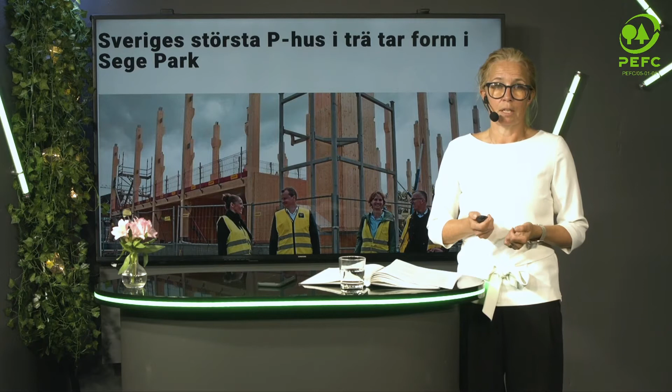This is an office building taken from a time-lapse video camera up in Uppsala, north of Stockholm. And a parking house is being built down in Skåne, in Malmö, 6 stories in CLT.

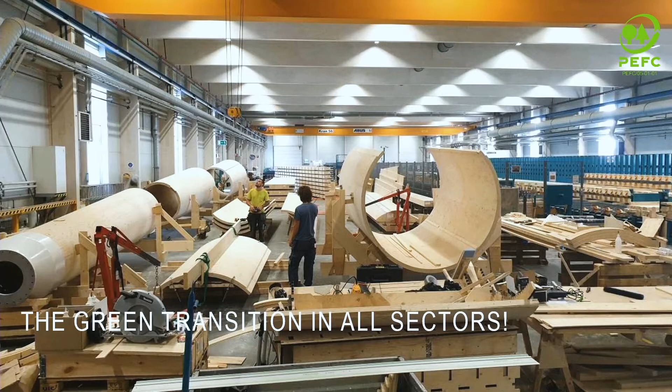We have caring homes, and we have also a lot of other types of infrastructure, such as this windmill in Glulam and LVL. And it's being erected, the first ones, outside Gothenburg in the archipelago. And it's built with the same logic as we build other types of building and even housing.

It's built in a modular way. It's really easy to transport thanks to the lightweight and the modularity of the construction, and it's being erected on site and has a really, really low carbon footprint.

And we, of course, also see wood as an interior material for interior use. Also, this staircase, which is in NCC's new headquarters in Stockholm, is being prefabricated and transported into a building site and then put into place at a building site.

So why wood in construction? Well, it's not just about exchanging one material for another. It also means that we have a new kind of business logic. It goes from being very much project-orientated to process-orientated. So the process itself, manufacturing technology, quality assurance, continuous improvements, experience feedback, all characteristics from the industrialized wood building industry.

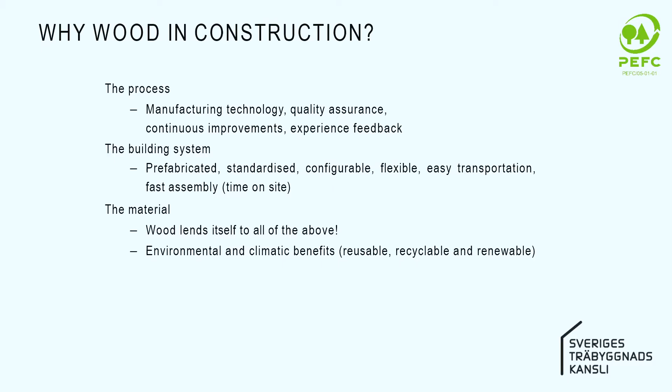And then we have the building systems, prefabricated, standardized, configurable, flexible, easy transportation, and also fast assembly, meaning a short time on site. And the material itself, of course. Wood lends itself to all mentioned above, and also thanks to the environmental and climate benefit from the material itself. It's reusable, it's renewable, it's recyclable.

And the construction industry, when I'm talking about more effectivity and the need for a new building process, has during time proved to have difficulties to develop in the same way that other types of production does. Still has a very poor productivity in general, and actually no improvement at all compared to industrial production. So this is really a hugely important area where wood construction comes into play.

This is perhaps also one of the most important issues to deal with when it comes to sustainability, is to really make use of all the resources that we take on.

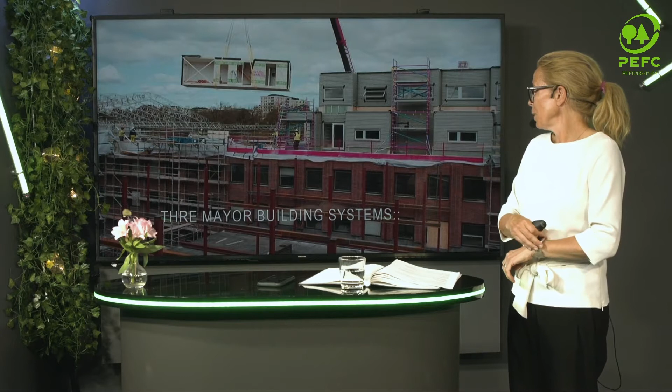Wood construction presents three major building systems. We have the modularity, with modules built to a very high degree with prefabrication on site. Almost 85 to 90% is built at the factory. All the kitchen, the bathrooms, etc., are mounted and put into place already in the factory. Short time on building site, and just the small adjustments are built on site, which is of course highly useful when we build in the already built environment, and also of course cost effective.

Then we have the CLT and panelized base system with load-bearing walls, and the whole structure in CLT. It's growing really fast and enables much more, or a higher level of flexibility.

And we have also development of post and beam systems based on glulam, often used in office buildings and commercial buildings, where also the flexibility and long span is needed. And there is also development of new systems and hybrids and combinations in between.

We have a wide presence at the leading universities, with the big universities having wood construction within their education. There is a lot of municipalities developing knowledge through wood building strategies, and we have some 15 producers of timber building systems.

We have big investments in new capacity, especially in the CLT. New suppliers, new producers are entering the market. And we see also that the building industry, the big entrepreneurs, are taking on wood projects at a growing pace.

We have strong wooden architecture, a great variation of projects throughout the country. And there is also a strong political push for wood construction. I'll come back to that.

The driving forces for wood are these. First and foremost, now it's the climate, the need to change the way we build and the material we use. But there is also a need for housing.

We still have a shortage of housing, almost all around Europe, in the world I would say. But in Sweden especially, this is a driving force.

Helsinki's target is to be carbon neutral by 2035. The most significant emissions generated in urban areas come from heat and electricity consumption and traffic.

The emissions need to be reduced also holistically, taking into account the emissions of city structure, construction and maintenance. The energy sector is moving forward quickly, so the portion of building is going to get bigger.

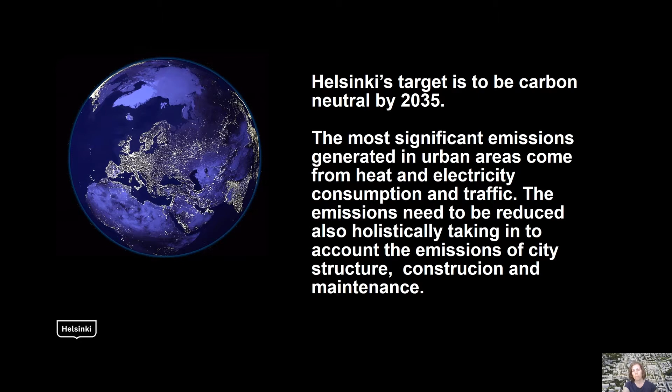Helsinki aims to be carbon neutral by 2035 and has an action plan with 147 actions towards this goal. We need to implement every single one of these goals, and we need to do it now if we want to achieve this goal. The action plan affects basically everything we do. We need to look at Helsinki and the world through carbon neutral lenses.

19 of the actions affect detailed planning one way or the other. Wood is one of the big issues in the action plans also.

So why would we have to build with wood? In order to reach carbon neutrality, at least at the moment, we need to focus on wood in the building industry. In the Carbon Neutral Helsinki Action Plan, I think one of the most important actions in detailed planning, at least at the moment, is the action plan to build more wooden buildings.

In building construction, we need to choose the most low carbon materials as possible, and at the moment, wood is the answer to this challenge.

People have asked me often, is there enough wood to build so much? Well, if you build a 5-story apartment block from wood in Finland, it takes 10 minutes to grow back in the Finnish forests. Or the same thing, if you build 138 wooden apartment blocks every day. So at least in Finland, it's not an issue. There is enough wood.

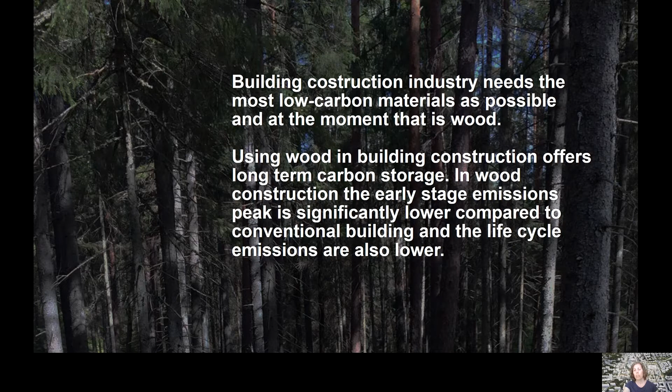Wood offers long-term carbon storage, and the emissions during building construction are significantly lower than in conventional building.

We've generated a new tool for detailed planning called HAVA to calculate life cycle carbon footprint and handprint. We made it so simple that it could be used in all our detailed plans so that we could get as carbon neutral as possible.

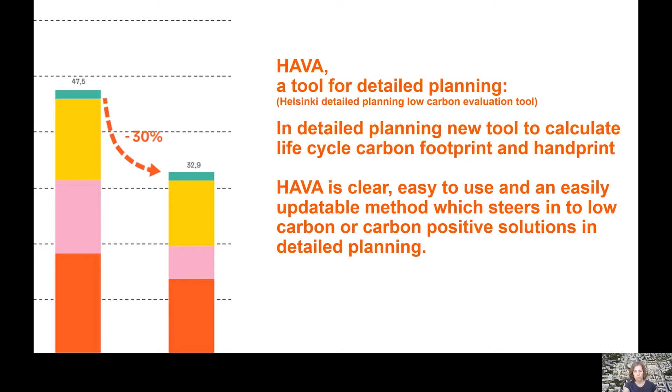Construction and maintenance may be almost 50% of the emissions in a life cycle of an area, so using wood in construction is a very significant part of aiming for the carbon neutrality target.

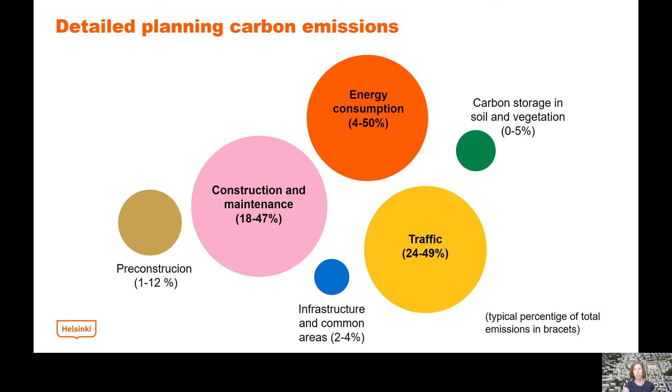So what's happened so far in Helsinki? Out of nearly 7,000 housing units yearly, the amount of wooden homes is still a very small minority in multi-story housing units. In this graph, you can see that the amount has been even at its peak, 8 buildings. Now we are hoping to change this radically.

43 buildings in 18 years, it's not very much.

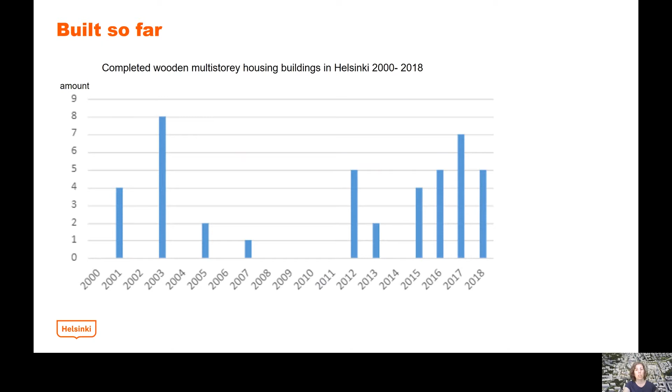The first detailed plan, which required wooden structure in a multi-story housing, came into effect about 20 years ago. There was some experimental building, and not all were built actually with wooden structure. But the one with wooden structure gained a prize and some praise.

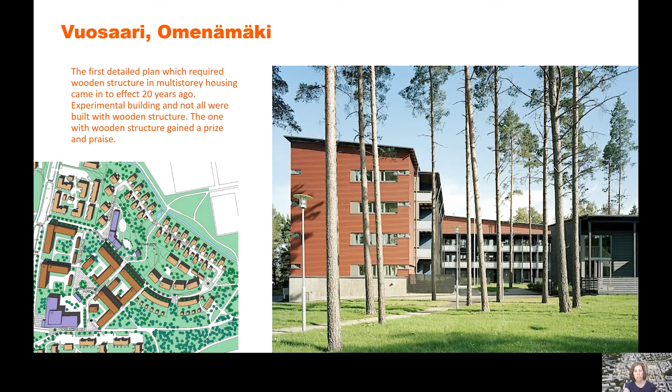A wooden village for 2,000 people started to be built around 2010 in Honkasuo.

Betoniteollisuus ry, the so-called Confederation of Finnish Concrete Industries, made an appeal against the detailed plan with wood requirements, but the appeal did not succeed. The judicial system assessed that requiring wood in building is justifiable for the positive impact on climate. This helped many Finnish cities to start requiring wood in building.

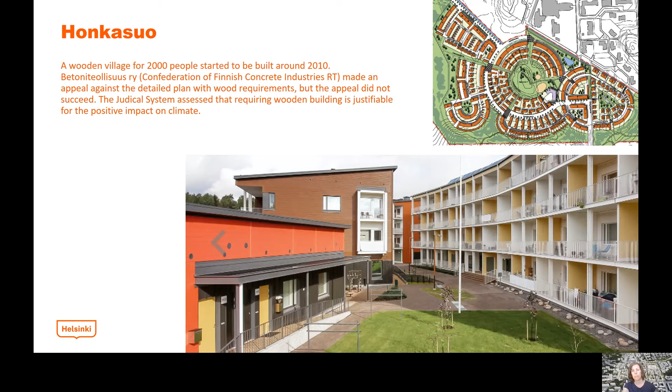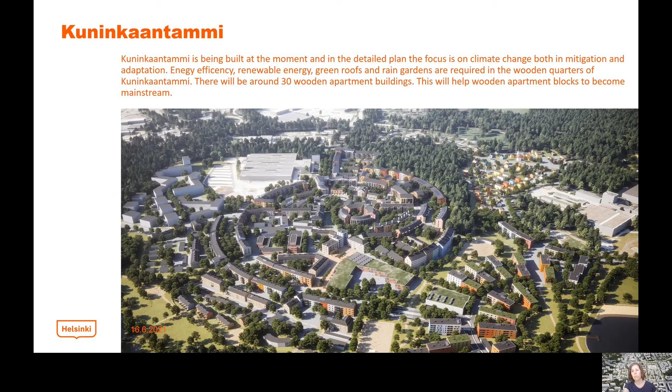Kuninkaantammi is being built at the moment, and in the detailed plan the focus is on climate change, both in mitigation and adaptation. Energy efficiency, renewable energy, green roofs and rain gardens are required in the wooden quarters of Kuninkaantammi. There will be around 30 wooden apartment buildings. This will help wooden apartment blocks to become mainstream in Finland.

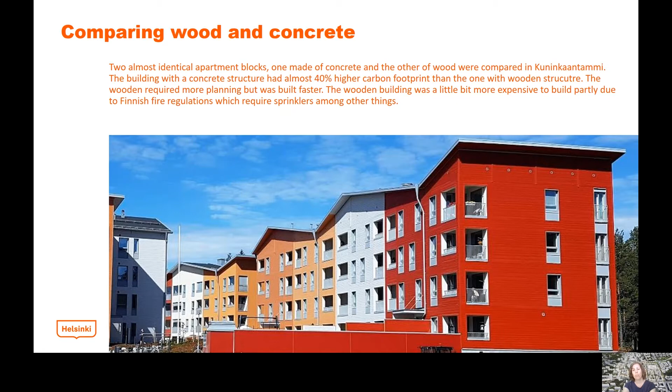In Kuninkaantammi, 2 almost identical apartment blocks, a concrete one and a wooden one, were compared. The building with a concrete structure had almost 40% higher carbon footprint than the one with a wooden structure. The wooden one required more planning, but was built quicker.

Several wooden schools and daycare centers are being built in Helsinki, among other public buildings. Most of them are required to be wooden from now on. Lapinmäki was the first daycare center with a massive wooden structure.

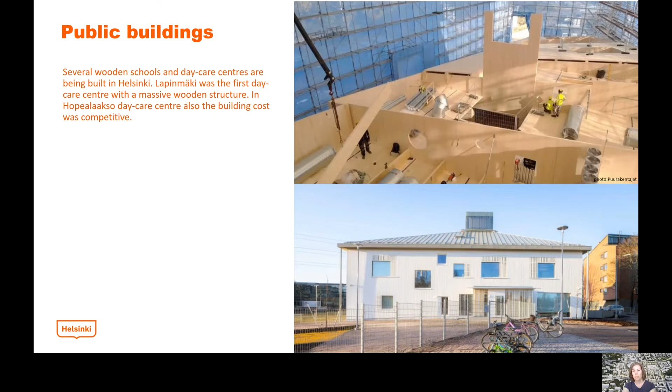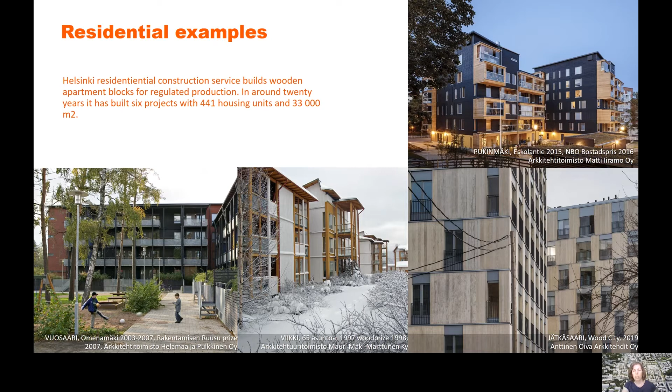And some residential examples. Helsinki Residential Construction Service builds wooden apartment blocks for regulated production. In around 20 years, it has built 6 projects, but it's going to be increased in the future. Here are some examples from Vuosaari, Pukinmäki and Jätkäsaari, so all over Helsinki.

So how does the future look like in Helsinki?

Concrete has been for so long the main construction material that people don't come to think about building with wood. This applies especially in infill building, but we're about to change this. Industrial prefabrication is popping up more and more, and hopefully wood will be seen as normal construction business in the future.

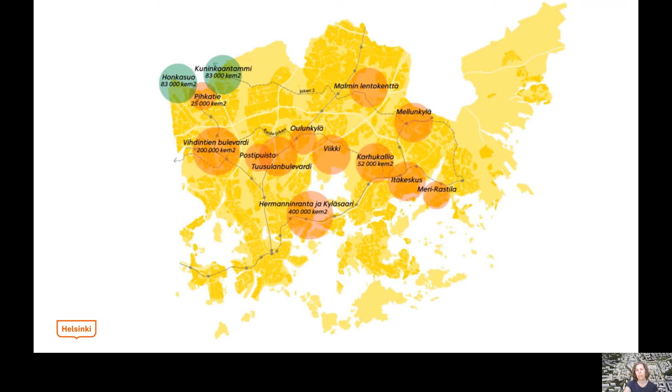Here's one project which has been really interesting. A project with the purpose of developing a wooden parking garage that meets Finnish standards was launched in March 2020. Using wood in parking garages could help reduce the carbon footprint in construction.

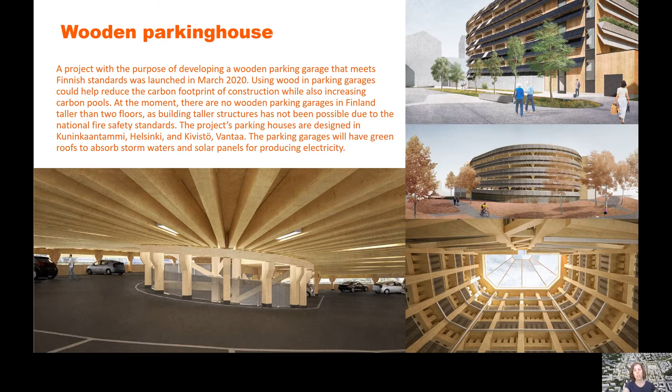The project's parking houses are designed in Kuninkaantammi, Helsinki and Kivistö, Vantaa. Vantaa is right next to Helsinki. The parking garages will have green roofs to absorb stormwater and solar panels for producing electricity. I'm really hoping to see these built in a few years.

How about urban renewal? Is wood okay in there? Many people say when asking about building in wood that yes, we want to support building with wood, but just this plot, or this location, or this project is not suitable for it. This is why we need to talk about building in wood more, so that it comes up in early stages, so that it is possible to build with wood.

In infill building, wood is very suitable because it's light, especially for adding floors, and the buildings may be prefabricated, so they are quick to install on their plot, so the public wouldn't mind the building so much. Wood is also a likable material, which the neighbors will accept more easily.

Here's an example about wooden redevelopment and adding floors. There has been an interesting project where the outer shell of a 70s concrete block has been redeveloped in wood, and there's been 2 floors added on top of it, also in wood. There's so far been a competition about this, and we don't yet know when this will be realized.

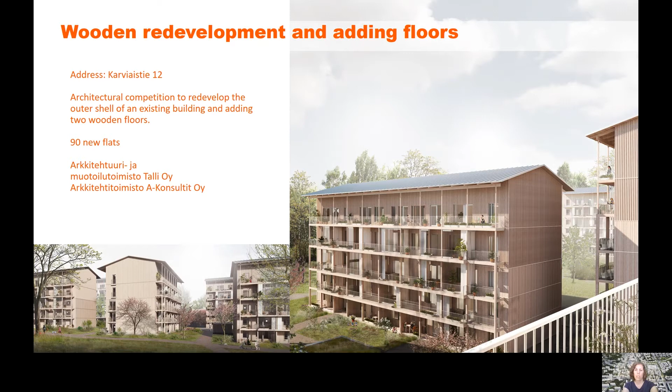We also have a master's thesis project going on in Tampere University for infill building. Marie Yli-Äyhö is designing a serial produced wooden apartment building. The building's construction is massive wood and has possibilities for variation. I'm very eager to see how this develops, and hopefully we'll be able to build these one day.

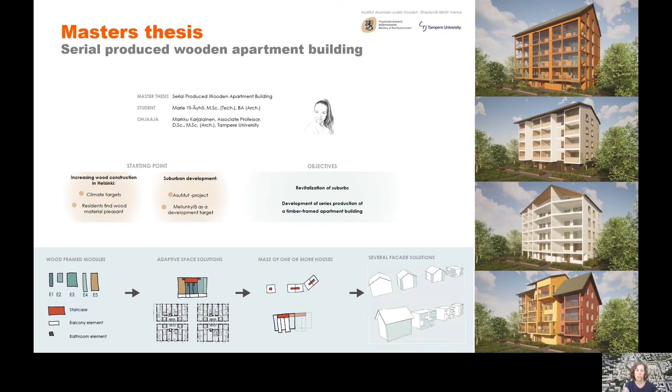With the same basic structural solution, buildings with varying architecture can be achieved, as you can see on the right-hand side.

The winner had a flexible concept that allows a lot of diversity and phasing, etc. Wood was being used in residential building in many places, and it had vibes from the 70s in an interesting way.

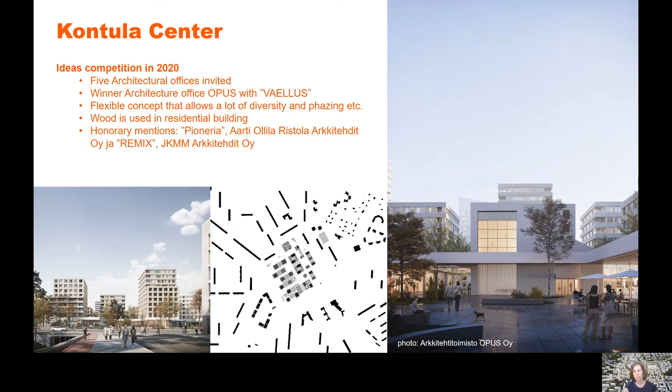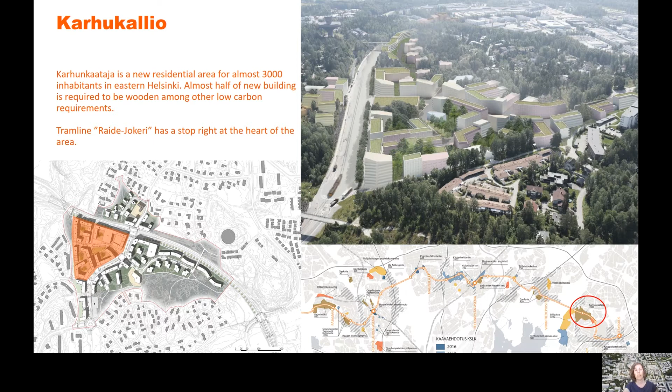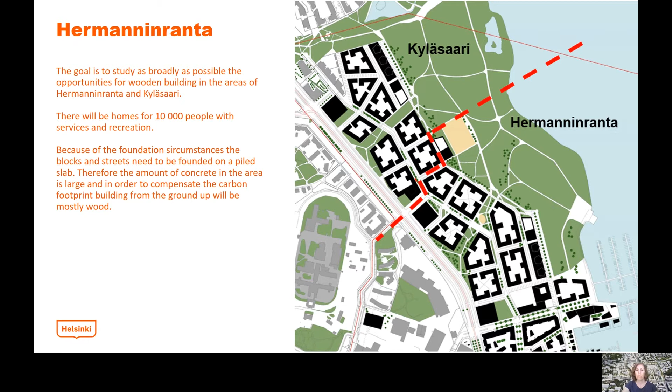Hermanninranta is also a big new area right next to the center. There will be homes for 10,000 people with services and recreation. Because of the foundation circumstances, the blocks and streets need to be founded on a piled slab. Therefore, the amount of concrete in the area is already large, and in order to compensate the carbon footprint, building from the ground up will be mostly wood.

While Hermanninranta is going to be a substantial area with wooden building, there are several questions that need to be considered during the planning process, like the impact of wooden building on cityscape, or wooden building in welfare and living conditions, the impact of wooden building on climate change mitigation, and the readiness of the wood industry. How will planning regulate building in wood?

But since choosing wood as the primary construction material at an early stage, all these questions will be able to be answered as we go ahead with the planning.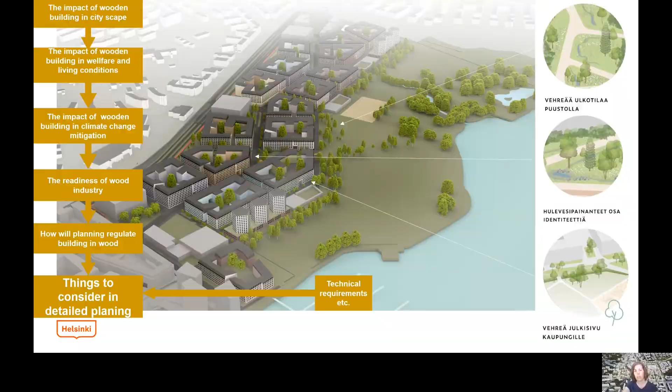Helsinki East Urban Centre is one place where we will have a lot of new building in wood. There was an international ideas competition in 2019 and 20.

We have ambitious goals towards a more resilient city structure for central Eastern Helsinki. Wood as a building material, walkable city structure, and existing excellent public transport infrastructure give a lot of potential for the future. There will be around 10,000 more inhabitants from 2024 to 2035. The goal is to make East Urban Centre as low carbon as possible, but the means are yet to be determined. Wooden building is definitely one of the means.

Carbon Neutral Helsinki 2035 action plan will steer us in the future. Puotilanranta is right next to East Urban Centre, or Itäkeskus, and it also has goals towards being carbon neutral in the future. City planning takes such a long time that the plans and designs we make in city planning should already be carbon neutral.

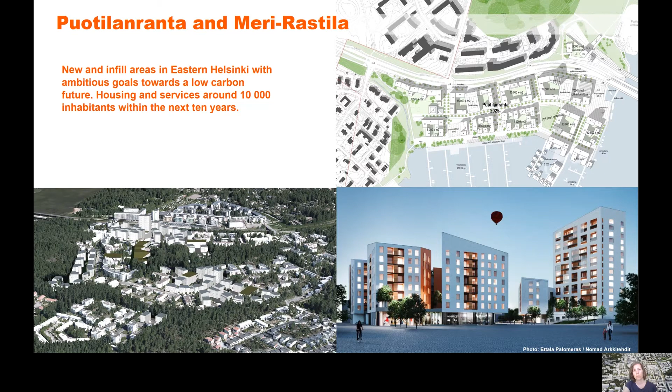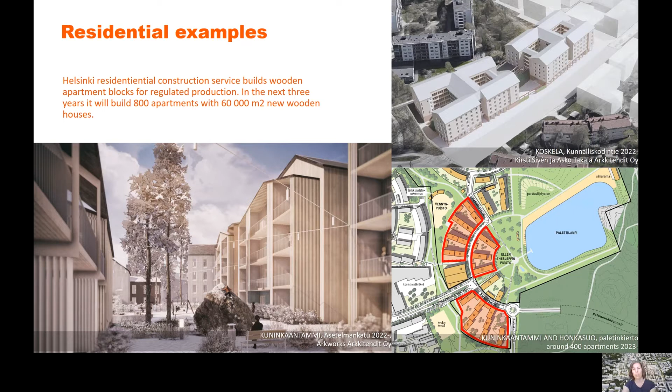Here's a couple of residential examples also. The residential construction service builds wooden apartment blocks for regulated production, and in the next 3 years it will build 800 apartments with 60,000 new square meters of new wooden houses. So the speed in wooden production will increase there too. There has been some concerns about builders though - is there enough builders, enough knowledge in design and construction, etc., if we want to build so much in wood?

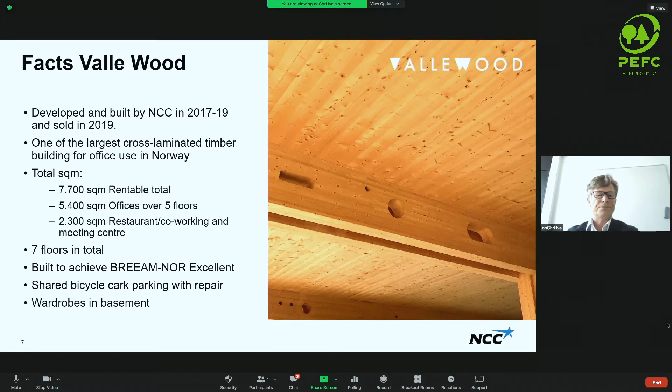We can't dig into the whole concept of the building, but it's also a new way of thinking about how to integrate the tenants' needs with the commercial areas. That's quite new in Norway, and it's a new business model for the tenants in this building.

As you see, it was very well received in the market. It's a beautiful building with a lot of special features to it. So we really should go and visit Valle Wood if you have the opportunity.

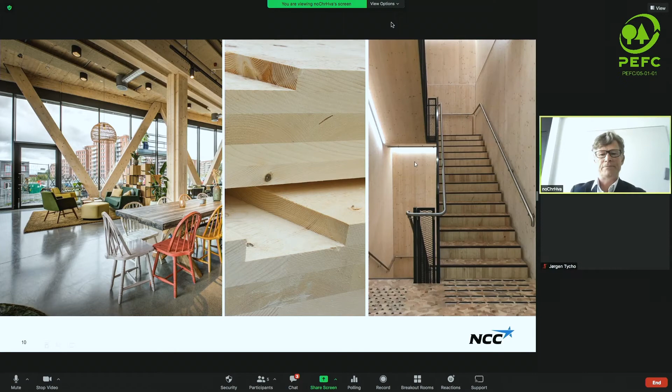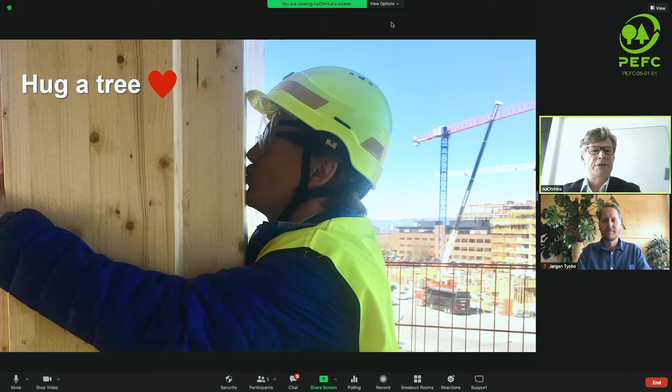Of course, one of the main things is that everybody loves wood, and also the builders. They loved to build this building, and we had very low absence of sick leave. That's unheard of in normal NCC buildings.

Okay, then I give the word to Jørgen.

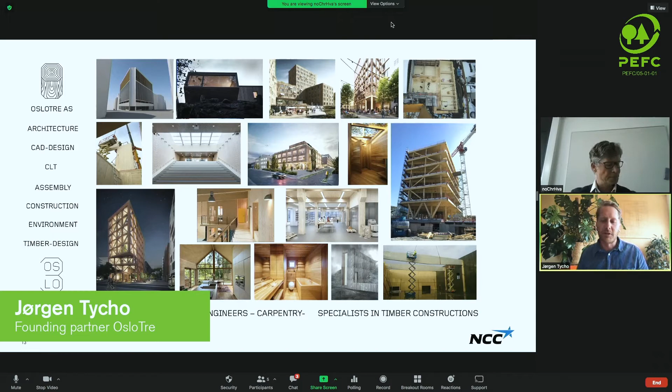Hello, good day. My name is Jørgen Tycho. I am creative director of OsloTre. We are an architect and engineer company specialized in timber constructions for the last 12 years. On the Valle Wood project, we assisted NCC to develop this timber construction.

So when we work with timber, it's important to know this about photosynthesis: the tree is actually working as a carbon harvester or sequester, and we can store all this carbon in the biomass.

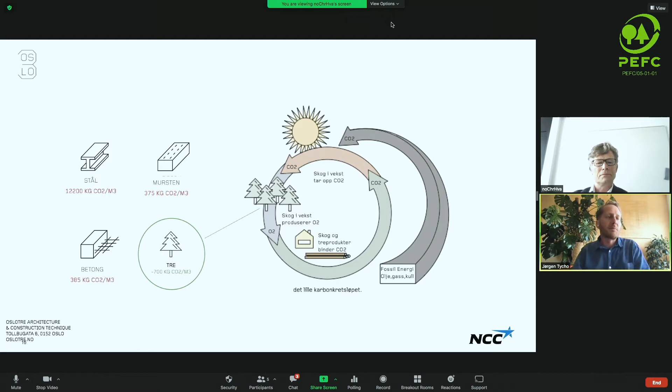By working with this small carbon circuit, this is also a way of working with carbon that is possible for us to understand, because otherwise we work with cycles that span millions of years.

By using timber as our main building material, we can actually have a negative carbon footprint, as opposed to other commonly used building materials that have a large output of carbon during production.

In this way, we can start to look at the forest as a carbon sequester, and our buildings and cities as carbon storage units. In this way, in the short run, we can deal with some of the carbon issues we have in the building industry today.

Valle Wood is a 7-story pure timber building. You can see the facade here. It's made of heartwood of pine that is untreated, but it's fire impregnated.

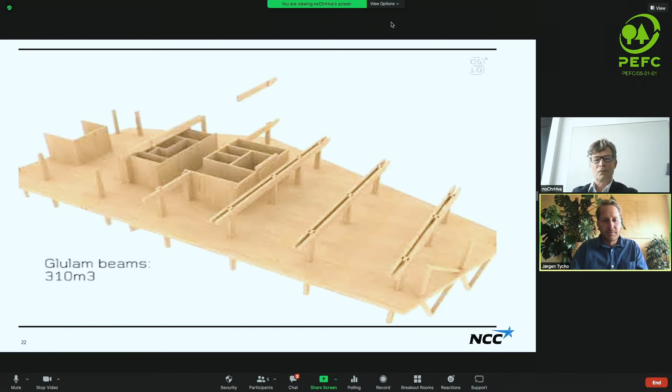I think this is a video, Christian. It won't start? Okay, we'll just go past it. It's on YouTube.

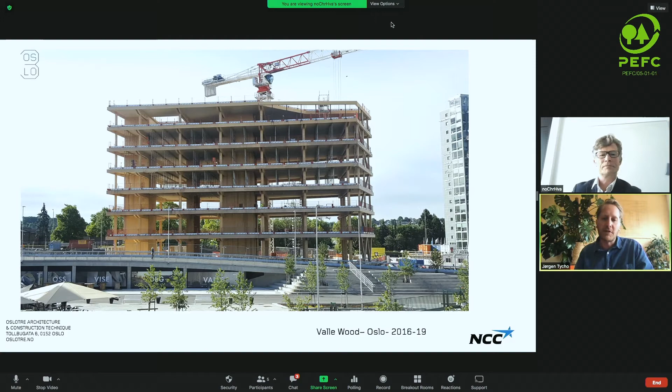Here we see the building before the cladding is on. What we see are the vertical towers for the elevators and escalators made of CLT. Then we have the column and beam construction of glulam, and then we have the CLT slabs, or the TCC slabs. The actual span here is 7.5 meters, which is a good span for an office building.

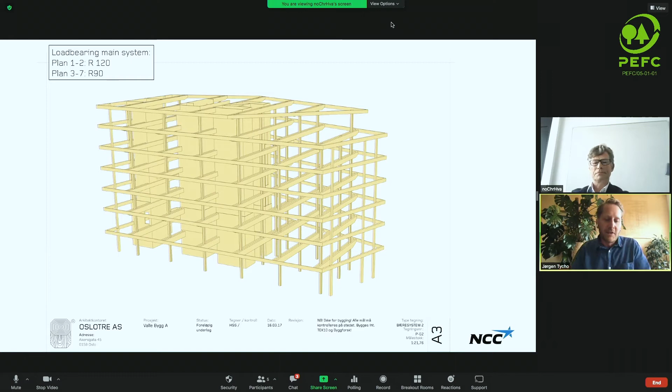Timber burns, but it burns very predictably. So all we see here is actual visual wood, and we wanted to have as much visual timber as possible in this building. But that gives some quite drastic fire requirements: we have 120 minutes on the 2 first floors and 90 minutes from the 3rd floor and up. We handled this by making the timber a bit fatter, a bit bigger, to meet the fire requirements.

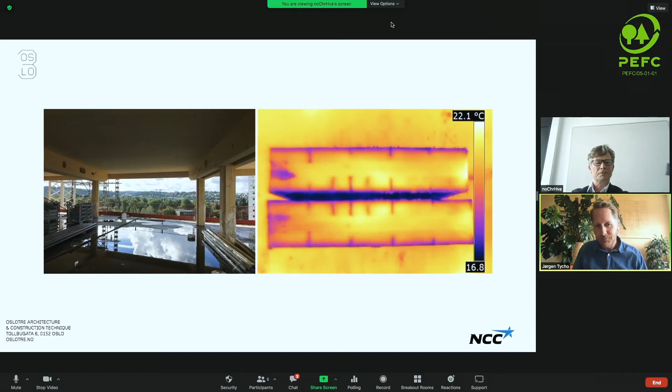Water is also an issue on a building like this. On top of the CLT—here we see the CLT slab, which is actually a TCC slab. It's a timber concrete composite working together, where the timber takes the tension and the concrete takes the pressure, making this slab extremely thin: only 24.5 centimeters thick. Actually thinner than what a concrete slab would be with the same span. A very interesting slab, and also, to my knowledge, the first time used in a large-scale building, in 2016.

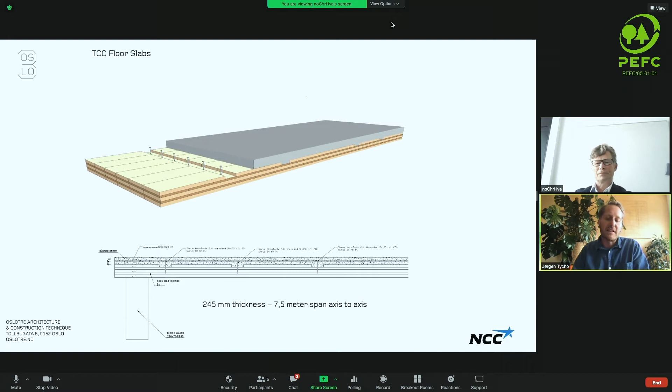So when we work with timber, the reason we work with what we call engineered or modern timber is because of BIM and digitalization, allowing millimeter precision before we send it to the factory for production. This is also very important to be able to build these super precise timber constructions.

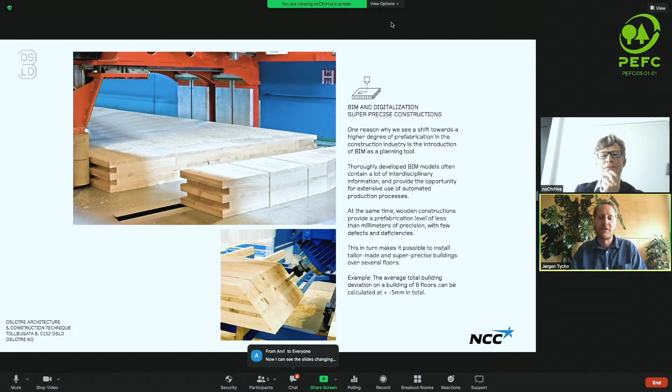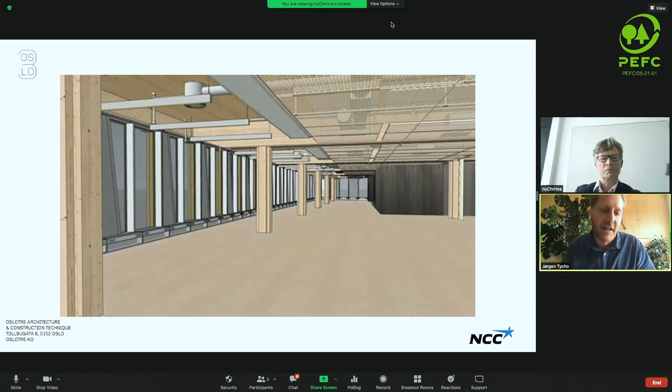So what was done was building up this building set, almost like an IKEA model, where all the different advisors were part of it. You can see all the installations. Everything is planned before building start, which is an important premise when you build with timber. You need to design it completely before starting production. This way we can also make a much more economical structure, because we reduce material loss, and it's much easier to plan for construction.

What is done is that even every element, every piece that goes into the building, has a lot of knowledge and information added to it. This way, when we come to the building site, you don't really have to think that much. All you have to do is assemble these pieces together.

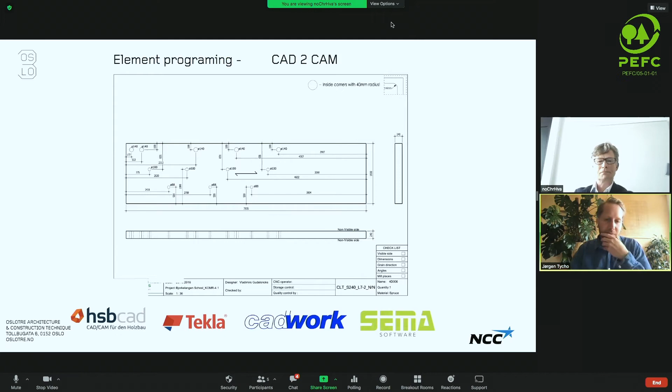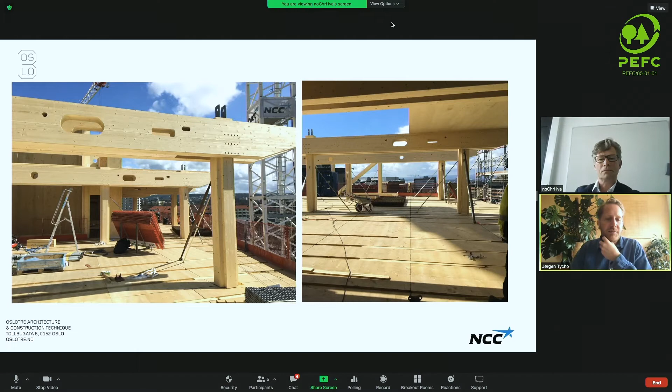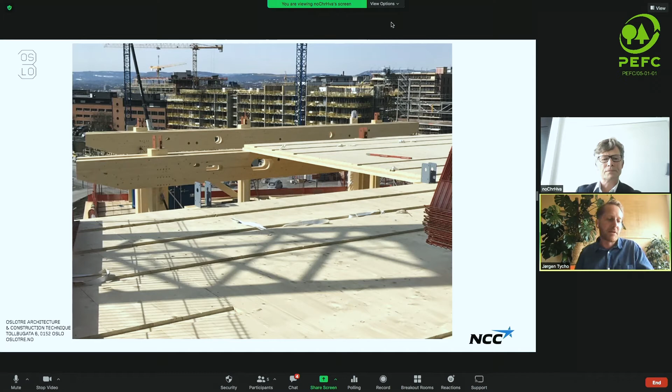Here are some photos from the erection of the building. We have the ventilation, electricity, and so forth, everything pre-installed. Here we can also see the slabs, the TCC slabs, before the concrete is cast. This is possible to do in two ways: either you cast the concrete on site, or you make these elements off site and then lift them in. But in this project, we chose to cast the concrete on site.

Here we see one of these interconnections that is only possible to do if you work with these 3D models, and the precision is under millimeter precision, even up here on the 7th floor of the building.

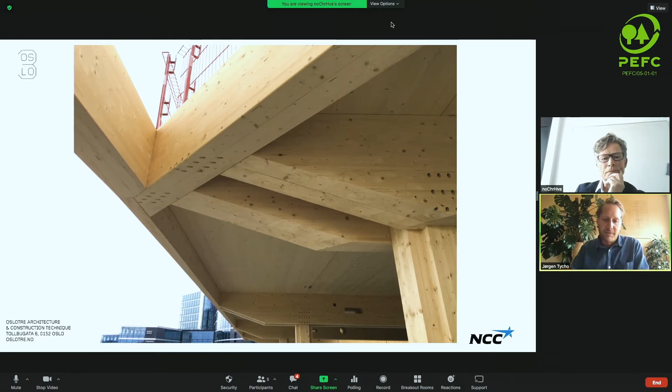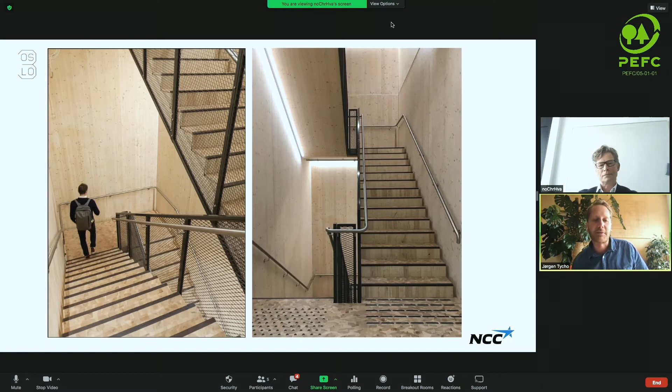Some more details. Also, the staircase is made of CLT, made of timber, and this is actually the only part of the building that is fire treated. It has fire paint on it, but it's not visible unless you're very interested in fire paint, in which case you would see it.

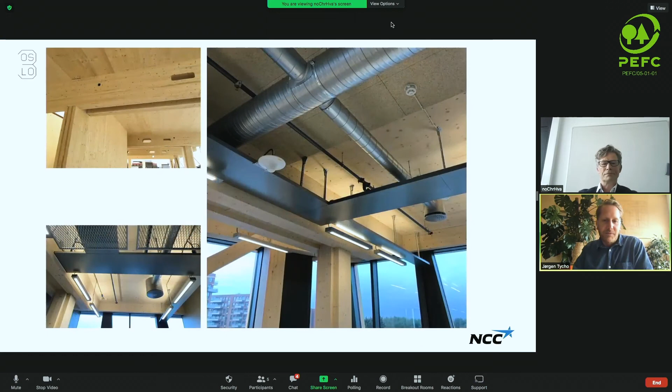Here we can see it from the office environment, and the installations from the restaurant on the first floor.

I will end our presentation with some experiences from the building. As Jørgen mentioned, planning is vital. It's very important that we get all the information into the 3D model, and this is, at least in Norway, not the way contractors normally work. We had to have a high degree of collaboration from the start, so we also had to make new contracts with the most important subcontractors, so we get all the information in the model before we order the timber construction.

We had some interface issues between the concrete and the wood, because we have two parking stories underneath the wooden building, and everybody needs to be very precise when starting this interface between the concrete and the wood. Of course, we also had a lot of issues about fire, especially in the facade, and we had issues with discoloration from the concrete slabs.

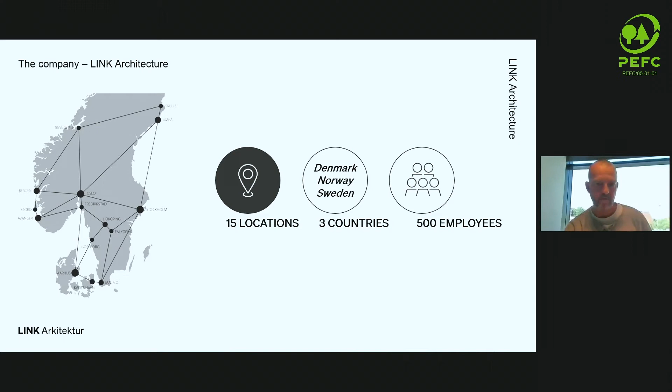We're working in most sectors of the building industry. We do a large proportion of health buildings, hospitals. At present we are involved with some of the so-called super hospitals in Denmark. Presently we're finalizing University Hospital in Aalborg, and we're also presently involved in the new University Hospital in Oslo.

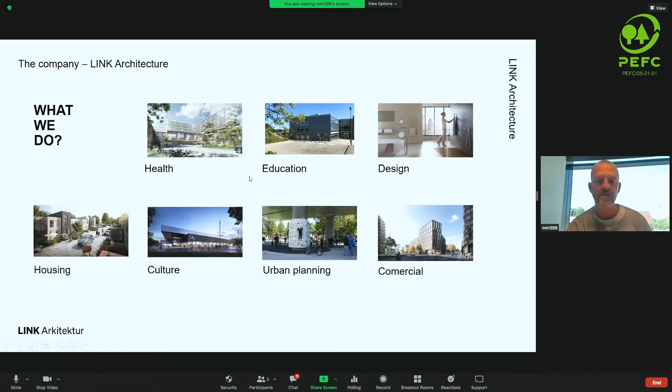We also design schools and institutions like the one you were fortunate to mention in your introduction to the seminar, the Hoppet in Gothenburg. We also have a small design department where we do industrial designs like hospital equipment, ranging to wooden stoves, and we also do design for a famous Danish company called Vola, who are famous for their water taps designed by Arne Jacobsen.

We also do housing, different cultural buildings like the sports arena from Randers. We do urban planning and also commercial buildings like offices and retail buildings.

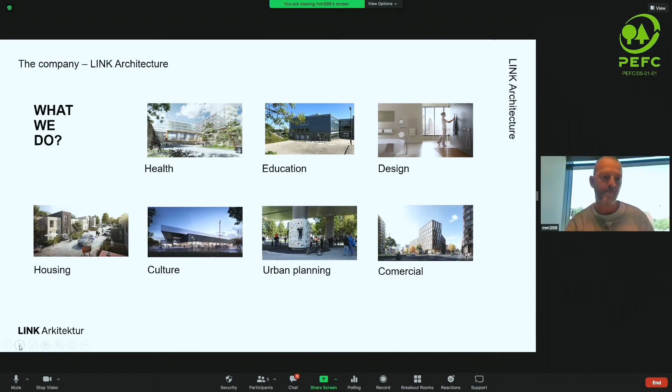We are in the process in Link Architecture to implement and strengthen a new strategy for sustainable architecture. Call it impact architecture. What we want to do with that is to try and look at where we can have the greatest potential to give a positive impact on environment and climate.

Likewise, with both sectors and our clients, where we will try to work to have an impact on how the sector is developing, and also on how our clients perceive the products, buildings, and the impact on the climate and the environment. We will work towards transparent, measurable and quantifiable results in our projects with well-documented results. We'll try and be proactive with the client in defining how the highest impact from a project can be achieved.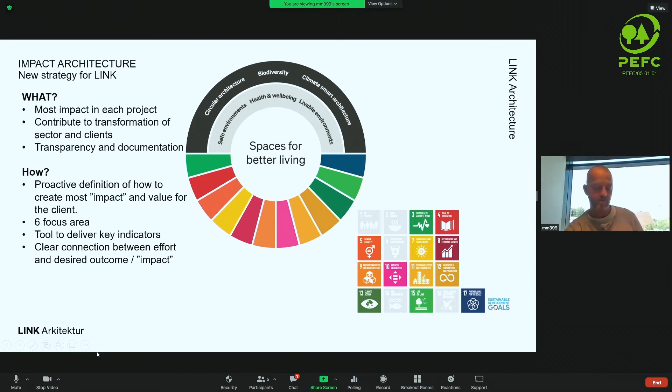And we've selected 6 focus areas that we think are the most important issues to deal with. And we've used these to relate our strategy also to the UN Sustainable Development Goals, and to make a priority of the sustainable goals where we will be able to influence and give a positive impact. Our strategy will also aim at developing tools to deliver key indicators to give a clear connection between our effort and the desired outcome, again with the focus on documented results.

In Denmark, as with the other Nordic countries, we have adopted the Paris Agreement back in 2015, and this has resulted in the Danish government then following up by adopting a climate law where we have a target of a 70% reduction by 2030. And this is where we say it's important to look at the building industry, which is responsible for approximately 30% of the CO2 emissions in Denmark.

And the focus within the building industry is actually shifting from energy in the operation of the buildings to the materials and the energy and resources used in materials. We in Denmark, particularly compared to Norway, Sweden and Finland, use a lot of concrete, and it's very industrialized the way we use concrete in Denmark. And that is, as we all know, a very high energy consumption material.

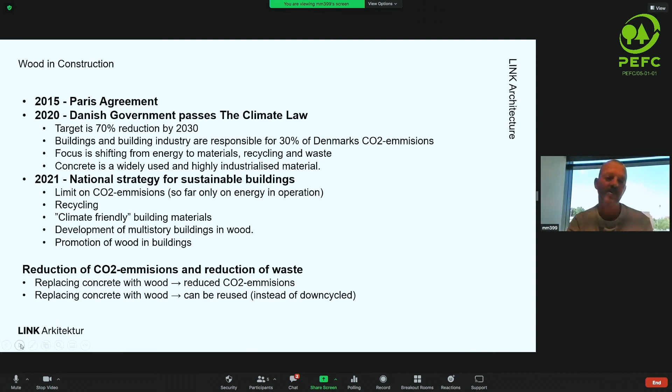This is just to show you the timeline of the government strategy, which shows that for buildings over 1,000 square meters, they're trying to put thresholds on how much CO2 a building is allowed to emit in the construction phase, not only the operation phase. So this will hopefully increase the focus on limiting CO2 emissions in construction, and therefore wood would be a natural choice of material.

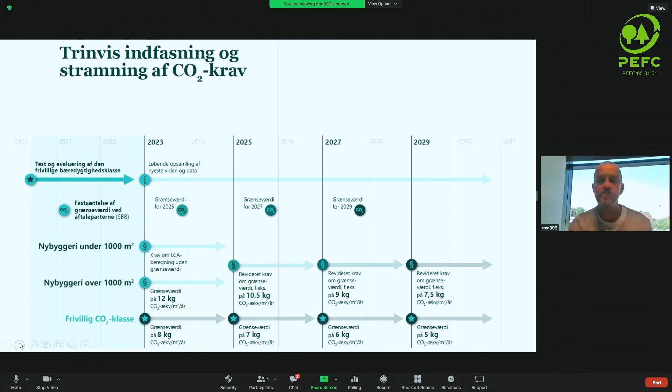Wood is of course certified by PEFC. It can also be certified by FSC, and we have other certification schemes operating in Denmark and the other Nordic countries. For us in the building business, it's a great help that we have these certifications and standards to actually make it a lot easier for us to use sustainable materials. And it's getting more and more widely used in the industry, and therefore it also becomes a lot cheaper to make sure that you are using sustainable materials.

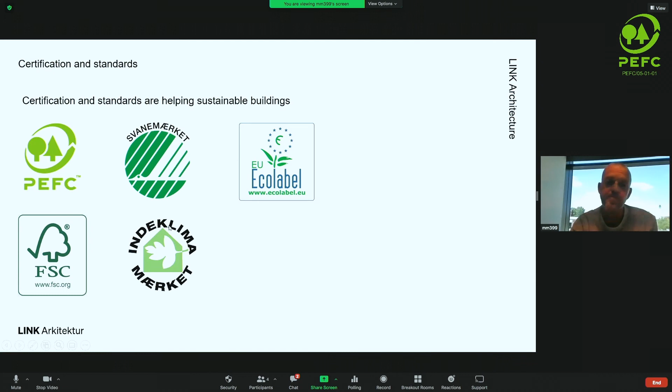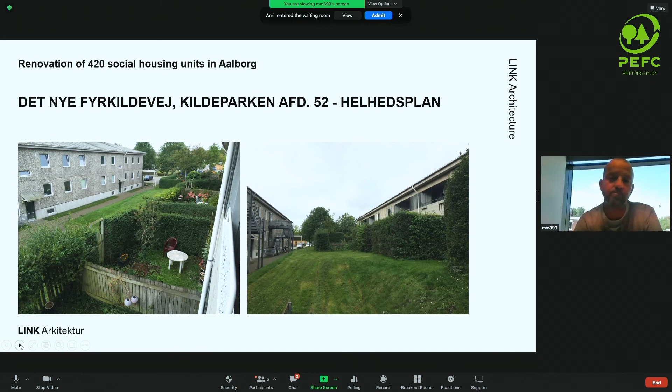In neatly positioned rows. Our way of looking at this was that we didn't want to demolish everything, because that is actually a big waste of resources and building materials. We wanted to try and see how we could improve these buildings and renovate them so that they become attractive.

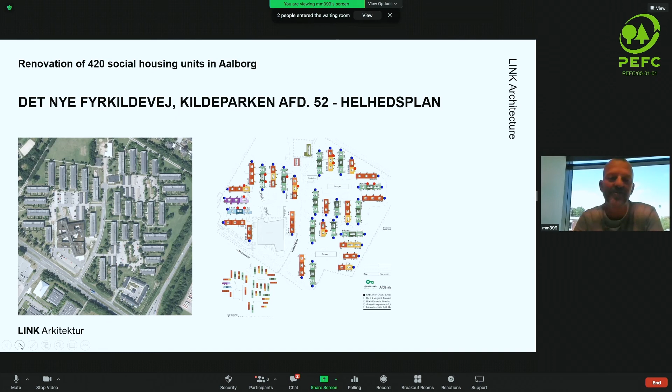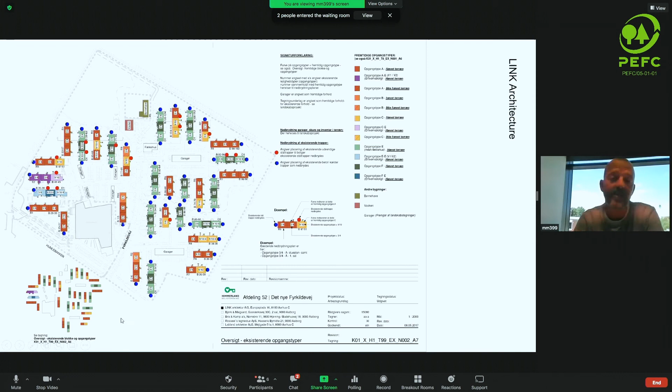The idea we came up with is to actually turn every second of the blocks around so that they would start facing each other, in combination with a very big renovation of all the housing units. So here it's more clear that every second block is turned around, made to face each other, so that they invite some social activity in between the blocks.

The facades were renovated with wooden facades. Some got wooden cladding, some got tile cladding afterwards. The new renovated houses lived up to all the new isolation and energy standards, and we fitted large windows to make sure you got proper daylight through all of the apartments.

And we were also able to create a social space where you'd actually meet your neighbor from the next door block.

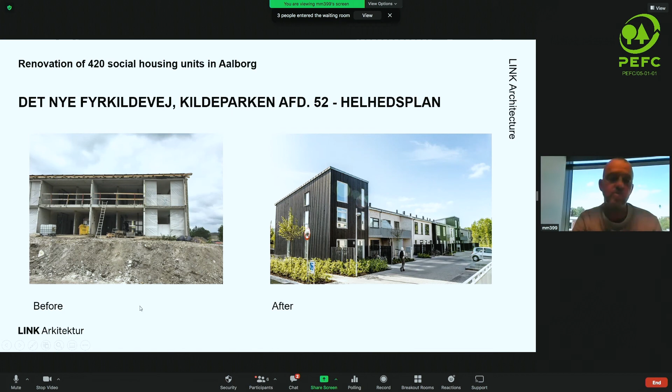So we preserved the foundation, basements, ground slab, slabs, and most roof constructions, and we also preserved all the load-bearing partition walls.

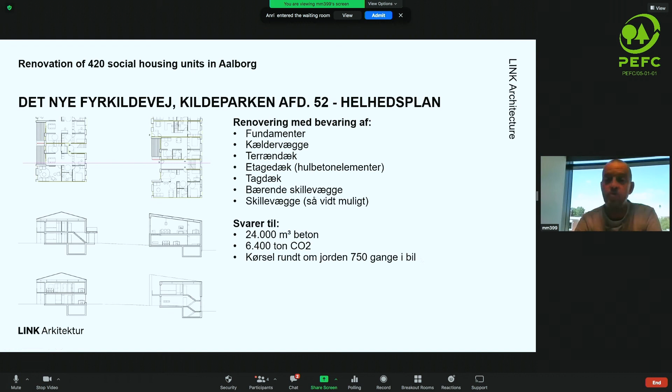All of these structures actually add up to 24,000 cubic meters of concrete, or equivalent to 6,400 tons of CO2, which, if you calculate, can make you drive around the Earth 750 times in a normal petrol car.

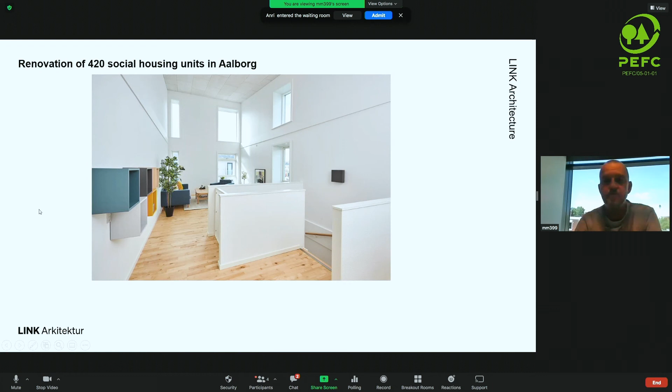And this is a picture of one of the finished apartments from these housing units. That was the end of my presentation. I hope it didn't take too long.

Thank you. Thank you. That was good. So it was really great to get a picture of your work, and also some of the calculations you have gone through, and obviously some very interesting projects.

I was wondering, you showed us a really good schedule on the reduction of carbon dioxide and the upcoming regulation. Has there been, within the construction industry in Denmark, a consensus when it comes to acceptance of this scheme?

Yeah, actually, when the climate law was adopted last year, they asked the different sectors of the industry to come up with their own plans and requirements to meet the target CO2 reductions set for the climate law. So initially, the building industry came up with their own suggestions to the government.